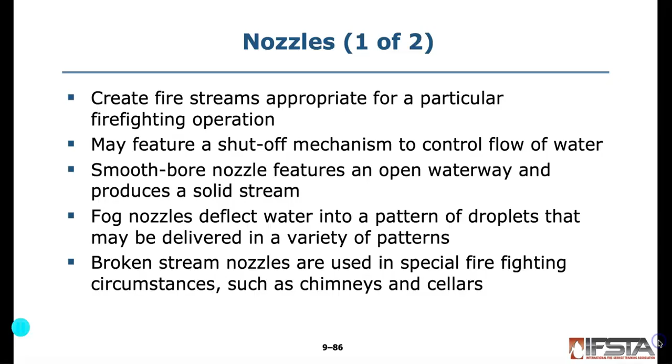And then in this, you have a specialized nozzle where it's got a broken pattern, right? It's delivering that water in a different pattern specific for your cellar, or even if you get into an attic fire, right? You can put your nozzle up into an attic, open it into fog if there's heavy fire in there, and it'll disperse that water over a greater area.

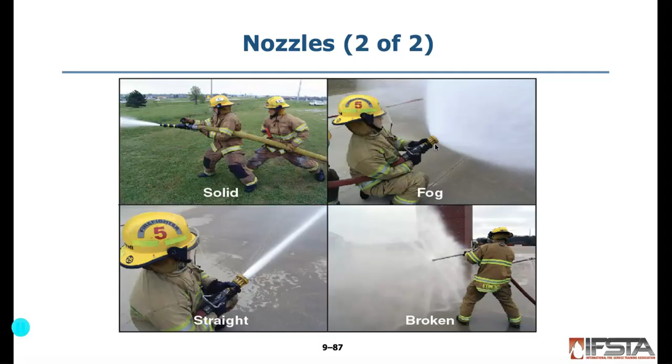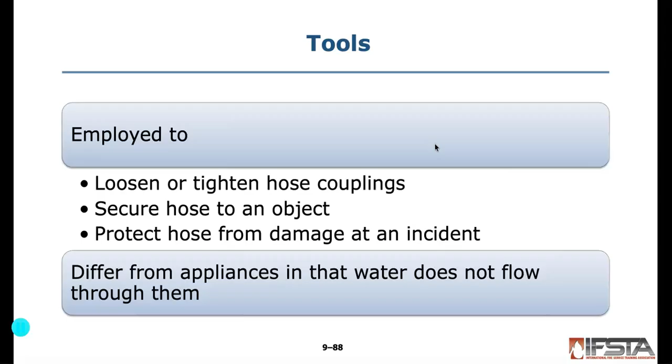So tools are employed to loosen or tighten hose couplings, secure hose to an object, or protect the hose from damage in an incident. These differ from appliances because water doesn't flow through a tool. Water flows through an appliance.

All right. Okay. And then moving on to our last section, which is going to be ground ladders. Actually, I think we have a couple more sections, but we have ground ladders coming up next. And then moving into fire department facilities, which is going to be our last section here. So what types of facilities do we have? We have several different types of facilities.

Obviously, we have our fire stations, maybe found at one location or dispersed throughout the jurisdiction, depending on how big your city is. We have 23 fire stations dispersed over 55 square miles. We have a headquarters, which is our administrative offices and buildings. We do have a communications center, which is its own standalone building. And then we also have a training center, which has our classes and our tower for burning. It has other ventilation props. It has an area for auto extrication. And then we have burn buildings there as well.

So the size of your organization will determine how many facilities they have and what type of facilities they have. In some smaller organizations, your administrative offices may be at City Hall, or you may have a standalone building for your admin services, or even multiple buildings for different types of admin services.

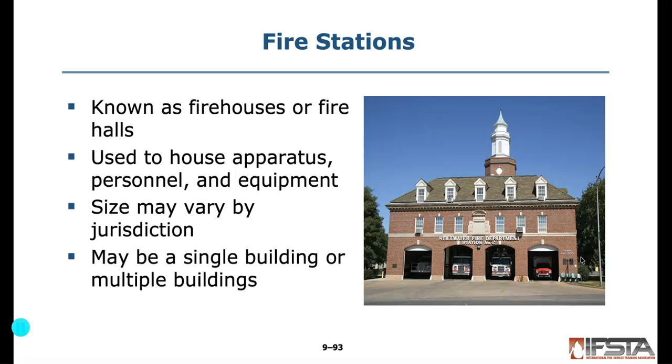The sizes are going to vary, and you can have one story to multiple stories. So we have several 2-story fire stations. We have one 3-story fire station, and then we have several single-story fire stations as well. So it kind of just depends on where you're at.

Your garage is usually referred to as an apparatus bay, and that's where you're housing your fire apparatus. It could contain water piping and outlets for refilling tanks, an electrical shoreline system, an air compressor, and an exhaust removal system.

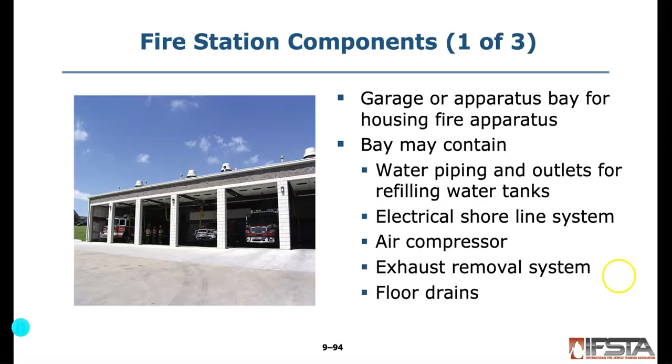So with an exhaust removal system, if you look in this picture, you'll see these yellow hoses coming down. Those attach to the apparatus exhaust pipe. And as you start them up, that system will kick on and it will release the diesel fuel fumes out up through the exhaust vents rather than keeping it in the apparatus bay. And then there's floor drains for cleaning and water removal.

PPE storage, we have lockers. They look similar to this. They're in a designated area based on rank and apparatus. They're racks. Sometimes you have lockers, sometimes you have cubicles. They have to be in an area that's adequately ventilated, right? So that it helps the PPE dry and it helps good airflow and ventilation.

We have a compressor in our station that we use for refilling SCBA bottles. Not every station has one, so other stations will have to go to one of the centrally located stations with a compressor to refill their breathing apparatus bottles.

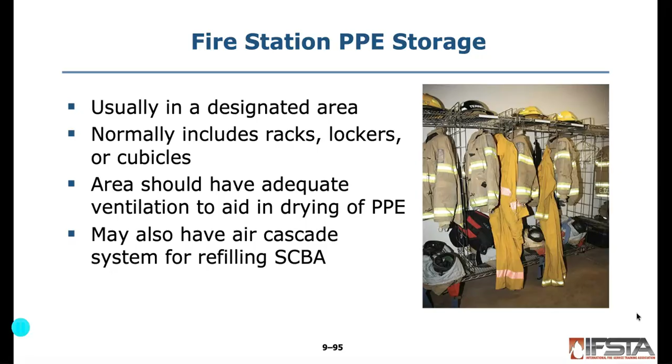There's hose racks for hose drying. Basically, once your hose is clean, you'll put it out and hang it up so that you can dry it. Separate storage area for tools and equipment used for apparatus and station maintenance. It's kind of like a house, right? You have areas where you put your vacuum and your tools, your garage, your toolbox, whatever. Same thing with the fire station. You have different areas for different tools and equipment.

We have sleeping quarters. Our sleeping quarters are kind of broken down: our chief officers have their own room, their own office, their own bathroom. Captains generally will have their own rooms that are separate from the engineers, the firefighters, the medics, and the ambulance operators. Most of our fire stations will have a meeting room or a training room, or a meeting area.

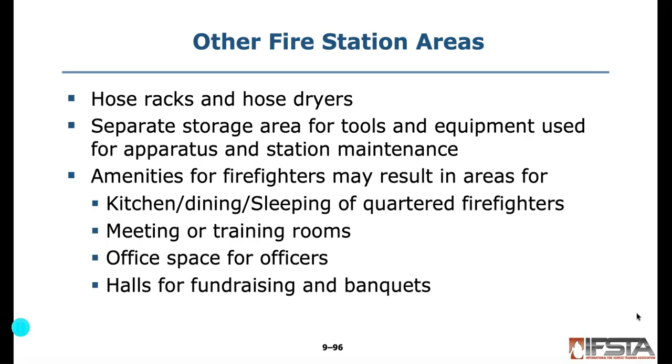Some have a training room or classroom. There's office space because there's a lot of administrative work that needs to be done for your company officers and chief officers. And then you have your kitchen area, your dining area. All right.

Administrative offices and buildings. They could be in a fire station or a separate building. Ours is a completely separate building. There's no fire station attached to it, so our headquarters is a standalone. These usually have our administrative chief officers, support staff, and clerical personnel. May be allocated for storage of records, conference rooms, and offices for other divisions within the department.

Our headquarters actually has all of our bureaus: our operations bureau, our administrative bureau, our fire prevention bureau, and our support services bureau, as well as our EMS division, are all in that building. We do have another facility that's away from our headquarters, but close by, that some of our EMS division have offices in.

Our dispatch center, our telecommunications center, is also a standalone for us, called the FCC. May be located at the department's administrative offices, a fire station, or separate facility. Ours used to be located at a fire station. It was separated from the fire station itself, but located on the same property. Now it's its own large standalone facility.

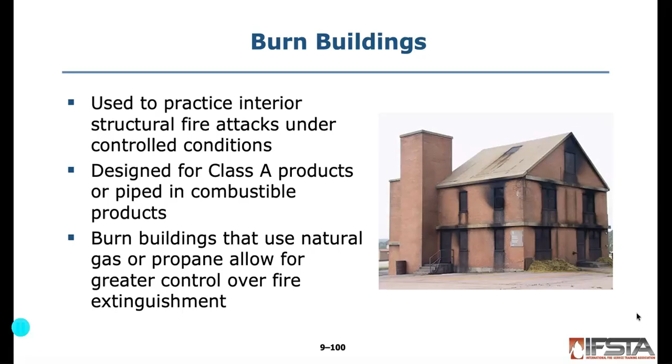We have a burn building on ours. It's used to practice interior structural firefighting attacks under controlled conditions. These are designed for Class A products or piped-in combustible products, and then burn buildings that use natural gas or propane. Those allow for greater control over fire extinguishment because you shut off the propane or natural gas and it shuts the fire off. We have a drill tower as well.

These look very similar, usually between 3 and 7 floors in height. They have stairs that allow access to the upper floors. We train our ladders there, ropes, aerial devices. We train our high-rise operations there. Basement operations we train in our drill tower as well. And they may be equipped with safety nets to prevent falls during training; we don't have those around the outside. We also have some ventilation areas in our drill tower, and some forcible entry.

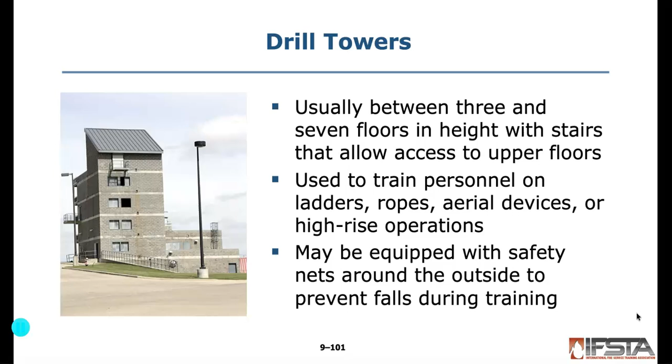Smokehouses, we don't have one of these, but it provides simulated smoke-filled conditions for firefighter training, to help firefighters develop confidence in using the SCBA and build proficiency in search and rescue functions. May be designed to replicate a home interior, and should include a ventilation system to quickly clear the smoke and adequate exit points.

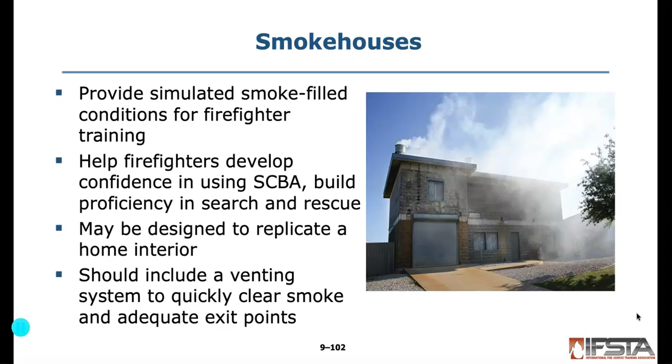Training pads, outside areas designed for specific purposes or props. We do have an area for flammable and combustible liquid firefighting. Driver operator training, we use our entire drill grounds. Same with pump testing and drafting. Vehicle extrication, we're able to get vehicles that are going to be crushed, and we have an agreement that we can use those for extrication practices.

And then we have an area for hazmat, and an area for trench and confined space at our drill tower. So our hazmat units use it, our USAR units use it, and then we have all other fire operations that go on there.

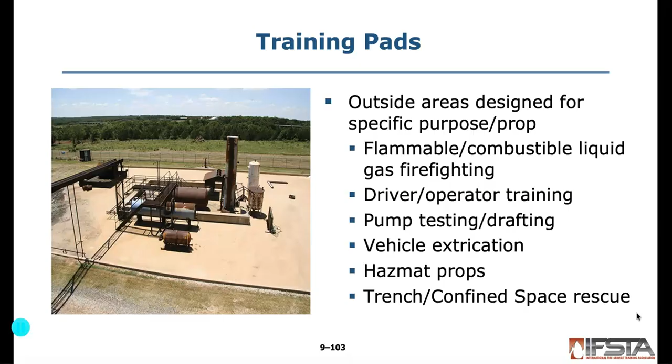Maintenance and repair facilities. Proper maintenance of apparatus and equipment requires special facilities and trained personnel. Maintenance may be done within a fire station or at a separate facility. Fire departments often conduct all maintenance at a central location to consolidate tools and other specialized equipment. And departments may use municipal motor pools, public works garages, or commercial repairs.

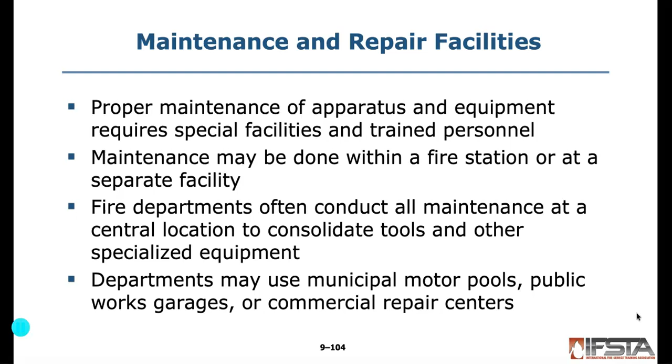So we have a fleet department that provides our repairs on our apparatus. And public works usually will handle any of our facility repairs. All right. Okay, and that's it for chapter 9.